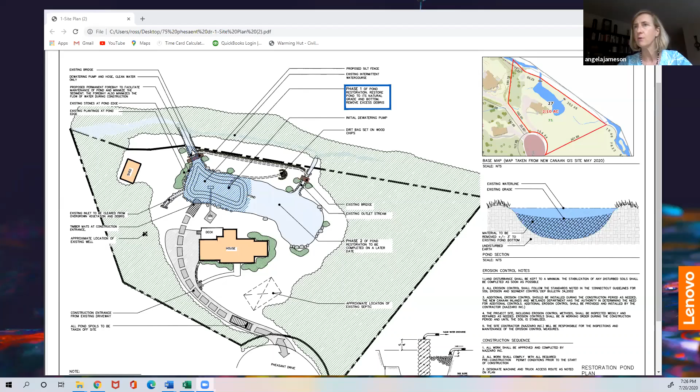This is Angela Jameson. We're being asked to approve an application for both phase 1 and phase 2 this evening, is that correct? Yes. So when you move to phase 2, you would essentially use the same logistics to remove any sediment, if that's what you decide to do? Correct, the same sequence. And the equipment and the bag would be in the same place? Exact same. Thank you.

Colin Dobbin: I had the same question. With regard to phase 2, there's some information about erosion controls here, but I would assume there'd be a supplemental submission to explain the additional details of phase 2. Is that not correct?

Phase 2 would be the exact same process as phase 1 with the same erosion control measures. I guess that's the issue - it's sort of very general about what the erosion controls are going to be. It just says they're going to be consistent with the regulations.

Silt fence and filtration systems. Other than that, there's really no disturbance of soils around the pond beyond any within the pond. So everything, all work really is within the pond from the shore. There is loading of material off-site; we're working off of an asphalt surface. There really is no need for anything other than standard erosion control measures. So there's no disturbance outside of the pond itself, is what you're saying? Correct, sir.

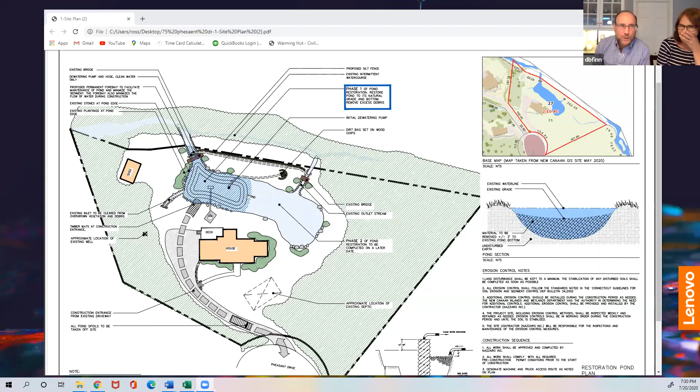Thank you. Good evening. Thank you very much. Congratulations, Mr. Finn, for being the client as opposed to the lawyer for once. Mr. Dobbin, you know that old phrase - the lawyer who represents himself is a fool for a client. So there you go. Thank you very much, bye-bye, thank you.

Moving right along, application number 19-2036, 554 North Wilton Road. Albert Vasco, Attorney, First Taxing District. Good evening, my name is Frank Murphy, counsel for the district, and Attorney Vasco is with me during this presentation tonight. Also present are Donald Euchers, the district engineer, Michael Elliott, Director of Water Operations and Project Engineer, and Raina Balbalski of the environmental firm of Tighe and Bond, our environmental scientist involved with the wetland.

This is an application for a temporary permit for the Milne Dam. The proposal is to have a project that goes through the plunge pond at the base of the dam. The total project time is approximately 1 month.

As part of the Connecticut Dam Safety Program, administered by the State Department of Energy and Environmental Protection, the dam is inspected every 2 years by our consultant, GZA GeoEnvironmental. The Department has authorized a subsurface exploration program to obtain data to support an updated, detailed stability analysis for the dam. In order to do that, they have to do certain studies. So this is a very limited project, limited to the base of the dam.

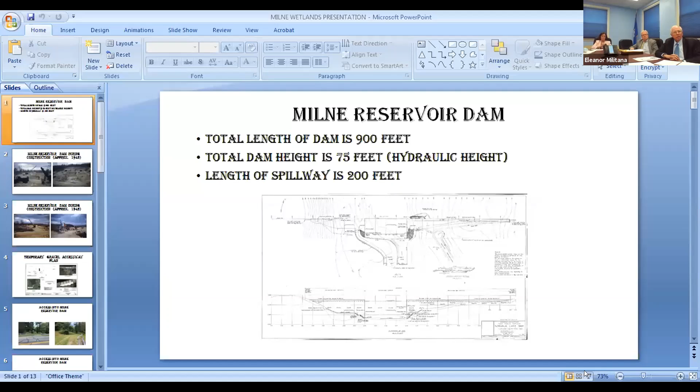I think you have before you our presentation, and I'd like to put up on the screen the information so we can refer to it. The first slide gives some information - this is a copy of the original 1945 plan for the dam. The length of the dam is approximately 900 feet long, assuming a north-south orientation. This dam actually goes from west to east.

Within the middle of the dam, roughly, is a spillway which is approximately 200 feet in length. The total dam height is 75 feet, and the plunge pool is at the bottom of the spillway.

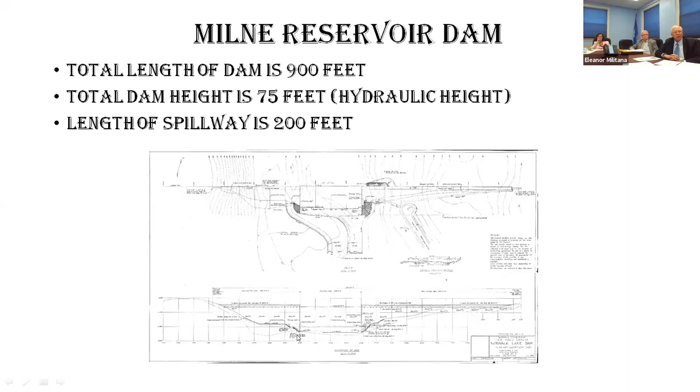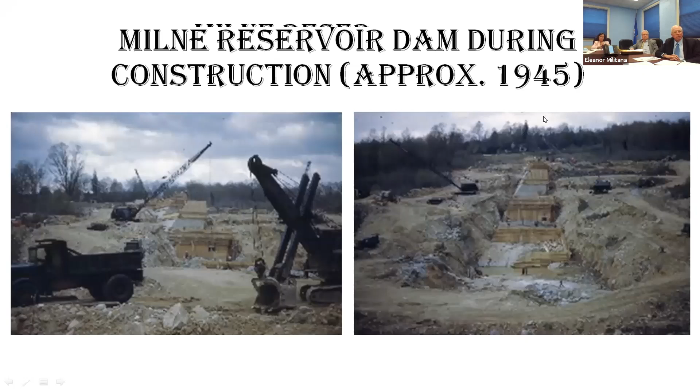If we go on to the next slide, we put in some pictures of the original 1945 construction, just to show you some information about the dam construction and its width. On the left-hand picture, we show some of the construction showing the base of the dam, and in the picture to the right, in the middle, we also show the depth and width of the dam.

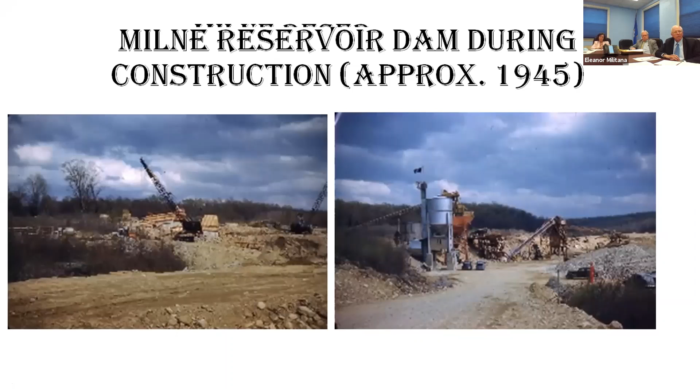Going on to the next slide, this shows other construction within the area that's now underneath the water area of the dam. If we go on to the next slide, there are 4 parts to this in the application.

In the upper left-hand corner, it shows a schematic of the dam, showing first where the plunge pool is located, and then it shows a line which is where the temporary access to the base of the dam is located. Just below that is the temporary stone accessway.

The bottom left-hand shows an aerial photograph of a portion of the dam, showing first North Wilton Road, which runs across the bottom to the intersection of Valley Road. The area to cross from North Wilton Road to the base of the dam.

Going over to the two right-hand photographs, first at the top, it shows the spillway. The area of the exploration is at that blue line, which crosses the plunge pond. The area is 15 to 20 feet wide and approximately 55 feet long.

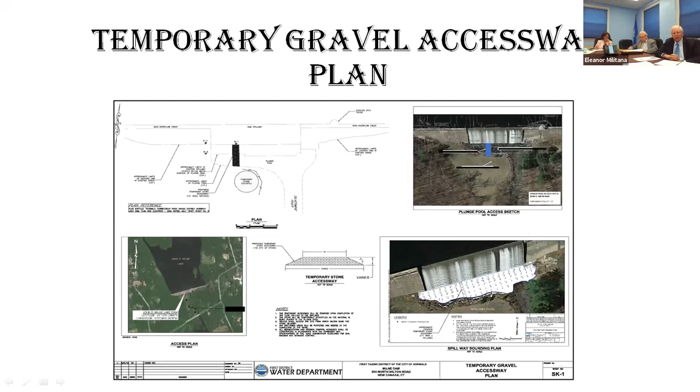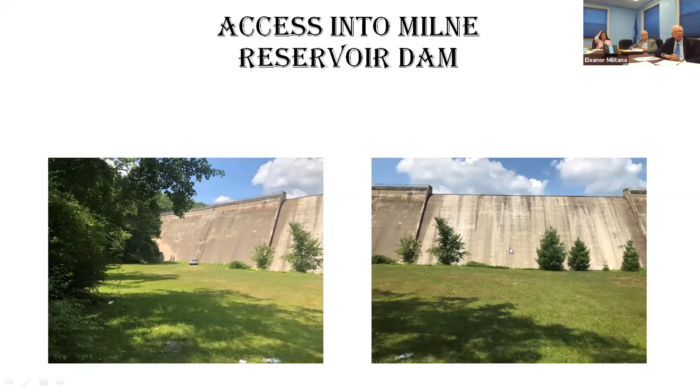If we could go on to the next slide, it shows specifically where the access way is to be located. Once that access way is built, trucks will drive across that for the purpose of a single boring at the base of the dam. The next slide shows the proposed boring.

In order to perform these borings, it has to be done on an angle so that you get the full depth. The boring will be through the bedrock inside the dam, and will be approximately 30 to 40 feet deep.

On the next slide is a depiction of the wetland. The area in green is the actual wetland, and then the upland area, including to the right of that, is where the gravel will be stored before and after.

At this point, I'd like to turn it over for a moment to our wetlands consultant, Raina Volvalski, to describe the wetlands and her studies.

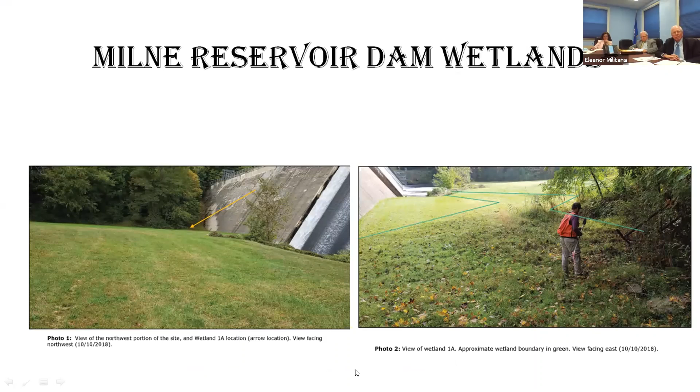So the area investigated is the yellow area shown here. We did walk from the road in, so we also took a look in that area, and we didn't see any wetlands there.

But the main area investigated was this area, and we found the wetland, which is in green. It's a hillside seep that comes out, and there was water actually flowing when we were there.

The hydrologic indicators: we saw surface water, there was a high water table, the soil was saturated, and there were water-stained leaves in the forested area. There were drainage patterns through the grassy fields, and geomorphic position plays a role in the wetland.

The soils were gray, gravelly sandy loam with brownish yellow concentrations. It's a hydric soil indicator.

The main area of the wetland that will be driven over is maintained as mature grass, and for the proposed project, I believe timber matting will be used to lay over the wetland to drive over. So the impact would be temporary, the vegetation will grow back, and I don't think the vegetation will really be impacted. The soil impact will be negligible.

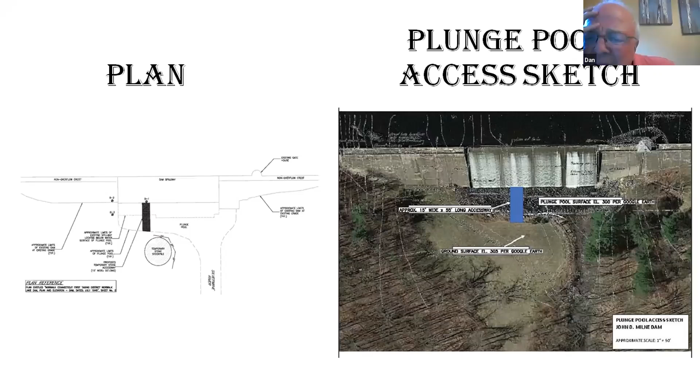This is Dan Stepanek. Can you expand on the purpose a little bit more—are you trying to learn if water might seep under the dam, or trying to determine the strength of the dam? If somebody could expand on that, I'd appreciate it. Response: We're trying to determine the stability of the dam, but I'll let Mr. Euchers or Mr. Elliott address it in more detail.

This is Mike Elliott. I work for the First District.

There's a bunch of facets, as you said. One is to see what the water level is like underneath the dam in terms of water pressure. Another is really just how strong is the foundation, how strong is the rock that the dam is sitting on, and also how well the dam is adhered to the foundation.

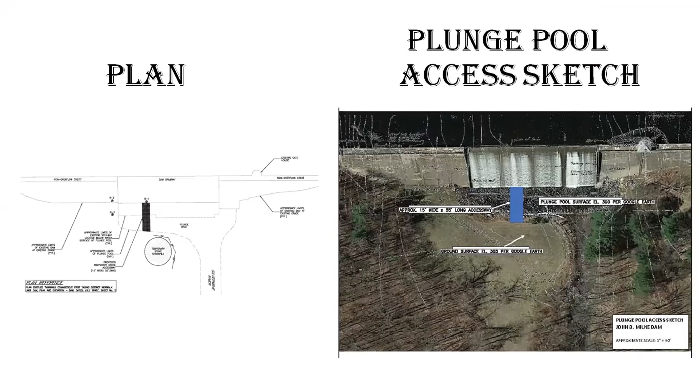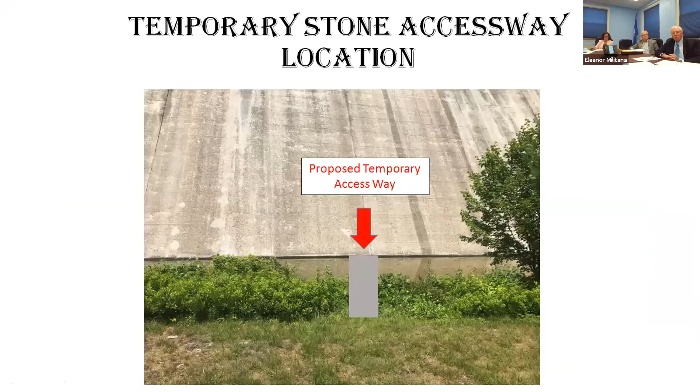They showed the picture earlier. There was approximately a 30-foot excavation in order to find good bedrock to found this dam on. So in order to refine the stability analysis, this is a good picture, because what's holding the dam in place is the conditions at the base with the foundation, and also just the sheer mass of it.

We did some initial stability analyses which used very conservative assumptions on the foundation, and we found that those were inconclusive. So we need to get much more definitive data about that foundation interface and be able to send that material to a lab to have them analyze it. That will give us a much more precise stability analysis, which, as Mr. Murphy said, would then allow us to complete the design for remediation if necessary. Does that answer your question?

Dan, you're muted. Dan, your mic is on mute. I unmuted you, go ahead. Did you hear the answer to the question from Mike? We did hear Mike's answer. I'm still trying to get Dan off mute. Oh, okay. Dan, your mic is still on mute. There you go, am I okay now?

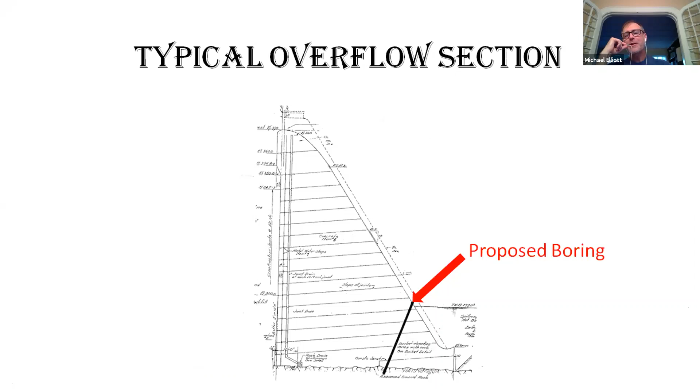How much water is in there? How much water does this hold back? Anyone? This is Mike Elliott again. When it's full, I forget the exact number, but it's about 650 million gallons. Oh boy.

This particular dam is partly in New Canaan, about two-thirds, and the other third is in Lewisboro. I believe the total acreage is about 330 acres.

And what cities use the water? It provides public water primarily for the city of Norwalk. About 40% of the city of Norwalk is served by the First District. There are additional customers in Wilton and New Canaan.

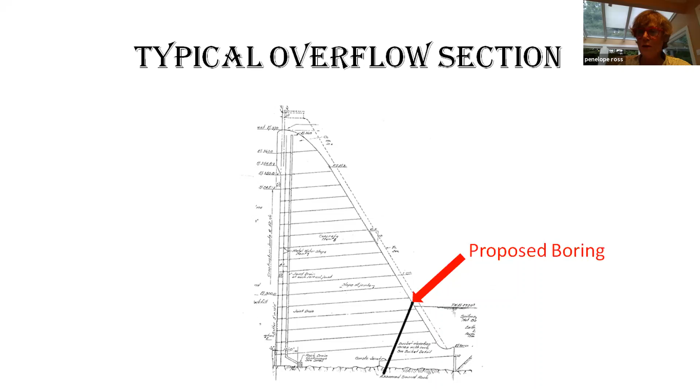Anyone else? Kathleen? I missed Penny on the last application. I just want to make sure that if she has a question she can ask it, so I'm going to unmute her and let her chime in. Let's see, I have no comment on this application - it was on the earlier one, on the pheasant. Okay, sorry about that, Penny. That's okay, I just thought it'd be polite to send you a message that I had a comment, so it's fine. Thank you.

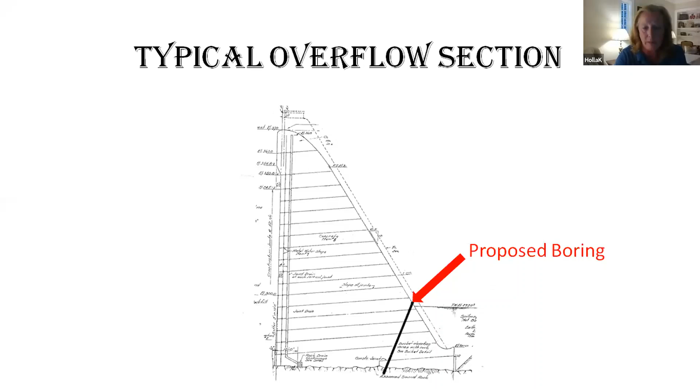Do you see any special conditions at all, Kathleen? The only thing that came to mind as Raina was speaking is she indicated that the small amount of wetlands that need to be crossed on the grassed wetlands would likely use a timber frame or some sort of matting. When we did our site visit with Don, he indicated the same. I think the fact that they're indicating that's what they would do to protect that wetlands is good. I don't know that it needs to be added as a special condition since they've already stated it, and I couldn't think of anything else that pops out. I think the plan's very well developed. DEP sort of shepherded him through the information they're trying to gather from the water company, and the water company is trying to comply with those directives from the state of Connecticut Dam Division.

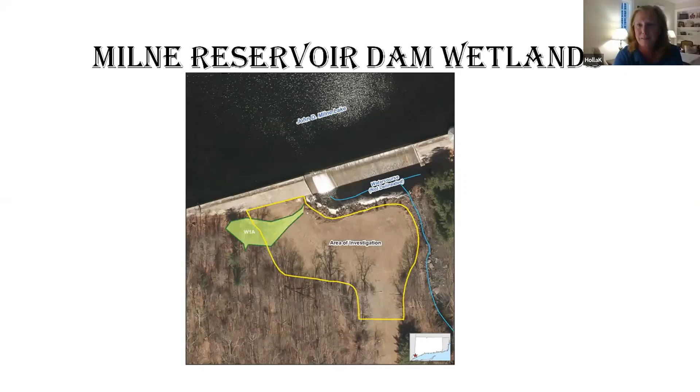In 30 days, hopefully they'll be done efficiently, and with Mother Nature agreeing would be good. I wish them well on their project. All right, thank you. When I went out there, it is really quite a sight, what you see. I had no idea - I've lived in New Canaan since '87 and didn't even know it existed. It was an eye opener for me personally.

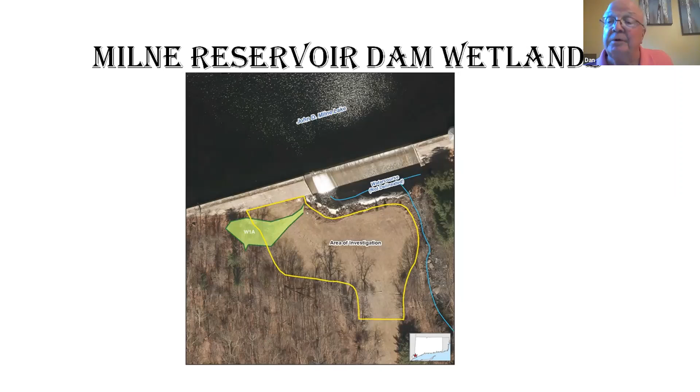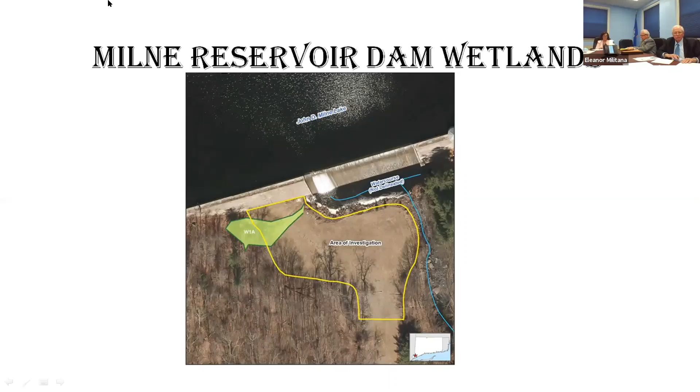Kathleen, is there anything you might want to address with the administrative actions? Items 10 through 13 were issued. I just want to call to your attention - number 13, I had a copy and paste error. It is actually 75 and 76 Turtleback Lane West, not Turner Hill Road. So that was an activity for Turtleback Lane West, which is underway. The other applications have all actually started - there's quite a bit of construction activity getting going in New Canaan, and all's going well. It's very busy, despite COVID-19.

Does anyone else have other business? Anything else you want to discuss? I just had a question - for the August 5th meeting, it's the Valley Road application that's up currently, is that right, Kathleen? That's the only one we'll be taking up. I think it will be 15 minutes at the most. Okay, that's where I was going with it.

Like a winner. And then the September 15th meeting will deal with, I guess, Bald Hill, right? 291 South Bald Hill. That's correct, and we will do site visits similar to how we've done them this last round.